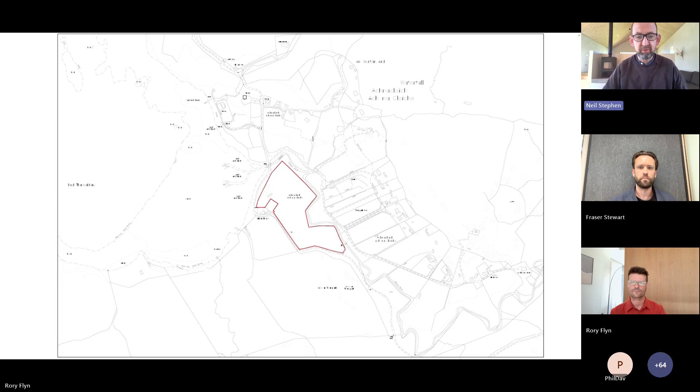I think when you're designing as an architect, you want to have constraints to work against, because when you're working against something, ideas follow. The hardest thing for an architect is just to have a completely flat field with no context.

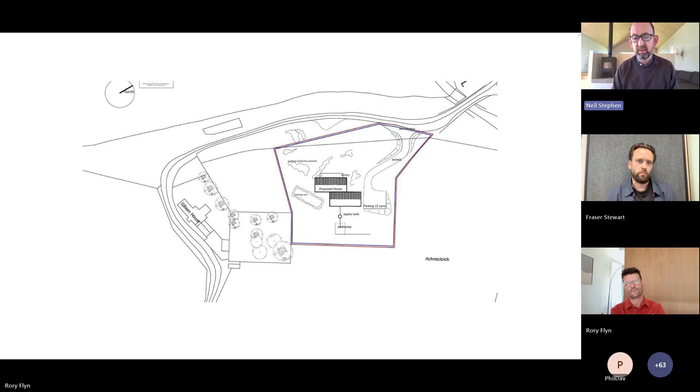And it didn't, and it just sort of felt as if it was plonked on top of a hill, and it would have great views, but we wanted to do something that was tied in more with the existing walls and felt as if it could be an outbuilding to the large White House, which is Gillen House.

So this is our diagram. If you look at that, it looks very simple, but there's a stone wall there. You'll see the dotted lines, and that's our house that's opposite it. Now that wall is 25 metres long, and so we decided to make our house 25 metres long. And that sounds slightly arbitrary, but actually worked out okay.

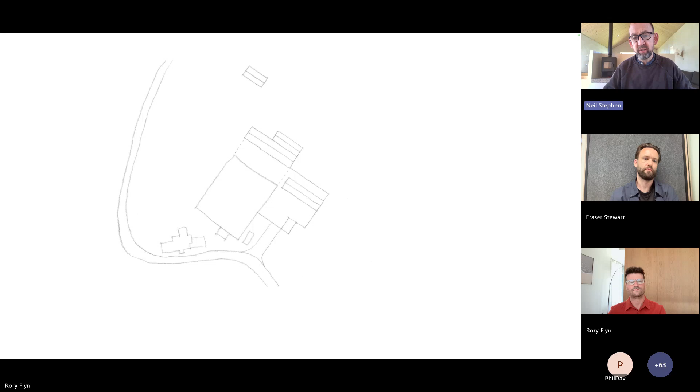And it gave us what will become—at the moment it's a football pitch for our 7-year-old, but it will become a garden, a sort of walled garden that's enclosed by those dimensions. And that was our idea about where to place the building in terms of trying to create some sort of context, but also had to have a byre and also another outbuilding which should be a holiday let.

So if we move on to the next slide, there's the house, there's the guest accommodation, there's the byre. So the house itself, it's a longhouse with 2 equal forms, and our idea in the way this was planned, which was to follow through, was...

We knew there was this lovely view looking out over the sea, and the previous planning consent was saying, let's do a wall of glass facing out to sea. We wanted to create a sense, our idea was to create a sense of reveal.

So you go through a journey through the house, so you go into a small entrance lobby with utility off to one side with a lower space. You go through into a larger hallway with storage, and as you walk through the building, you get a tantalizing glimpse up—there's a window to the view up, but you don't quite see it as you come in.

Instead, you're getting these tall windows facing out onto what will be the garden, or as it is just now, a football pitch. So it's a really simple idea, but it was trying to articulate it in plan.

One of Laura's strong ideas was, I don't want this to look like a standard Heb home or a standard Dualchas house, which would potentially have been a lot cheaper for us, I think. But she wanted it to be a building that's really bedded in the ground, that's built of clay block and had a real solidity to it.

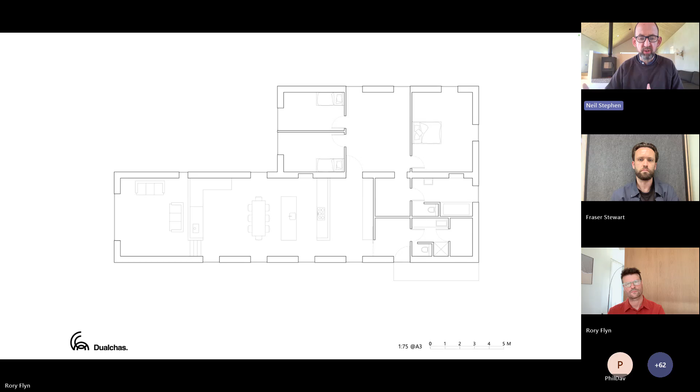And there was to be no paints, no plasterboards, to minimise membranes, just to make it a very natural building. So the clear articulation of those materials also had to be clearly articulated in the plan, so we could actually deliver that when it came to it.

So if we go to the next slide, you'll see the section. It's a very, very simple form. Now, just because something is a simple form doesn't mean to say that the building is simple, because trying to deliver those forms required a bit of thought and skill.

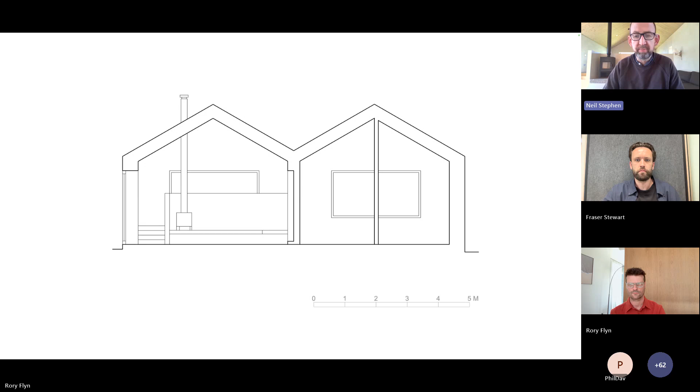Because you'll see there's no visible ridge beam in the roof. But it gives us that really, really clean space that you can maybe just see above me here. And that was one of the things that we wanted to achieve. Maybe we can show it in the next slides how it's done.

Externally, we have these very simple roof forms. We thought in the landscape, as you approach this building, having these simple pitched roofs facing each other, reflecting the jagged nature of the Cuillins behind, would actually soften it in the landscape. If it was just one big form with a horizontal line as you approached, it would jar against the hills. So you're thinking about context, not just how the building works, but how it would actually look in the landscape with these simple forms.

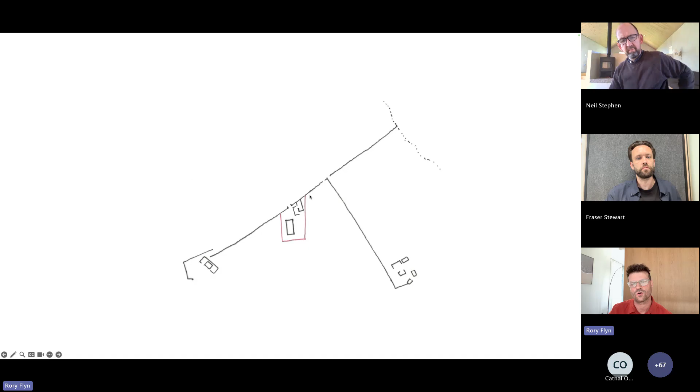This was the immediate context for the building and something that we wanted to work with. So this shows the break in the wall, which allows the roads to come into the site, and this is the existing house. At the moment there's an existing shed in the corner here, and the idea was to build a new structure right in against that wall and rebuild the section of the wall that runs through the site that the client is in control of.

So this shows the break in the wall and the new building here and the existing building. The idea really was to work with 3 new walls and 1 existing wall.

So a new stone wall hides the building from the houses around and the house on the site, and then a new timber wall forms storage and kitchen and a warm lining to the interior, and a new glazed wall sits on the existing stone wall, the restored section of the existing stone wall, and gives a clear outlook to the horizon, to Brothers Point, and also up the existing stone wall.

So there's a very strong relationship between the walls. The clients were able to purchase a piece of land on the other side of the wall, which meant we could glaze right up to the perceived boundary.

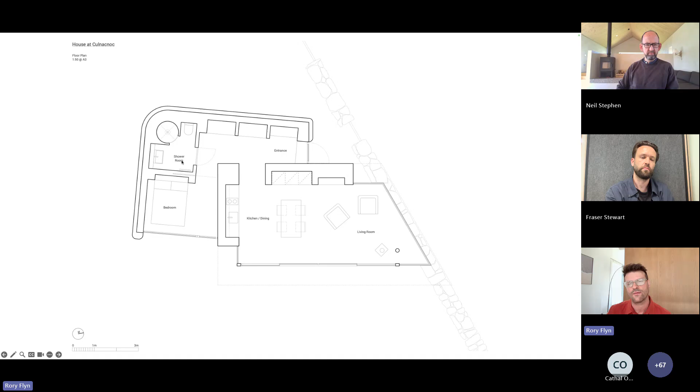And it's a very, very simple plan, which allows a very sheltered entrance, a private bedroom and shower, and then an open plan room, which opens out into the landscape. And it was that strong idea that was followed through on site.

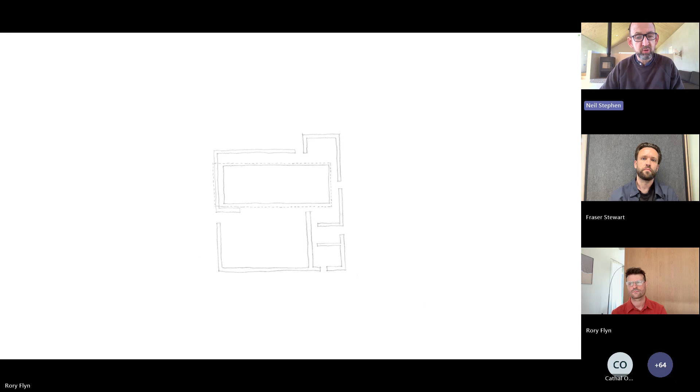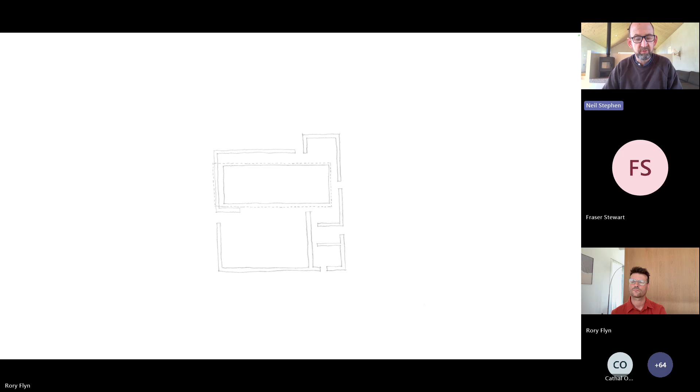Now, one of the key things in architecture when you're doing a project, and I always say this to clients, the most important part of the project is the initial design, the initial idea, because if you get it wrong and you keep going with it, whether you're doing planning or warrant drawings, but you're still not quite sure about it, then it's a lot of hard work and a lot of effort for something you're not convinced by. And I think if you can get a strong idea and follow it through, it's a much more enjoyable process for both the architect and the client, because architecture should be good fun. These sort of projects should be great fun if they go well.

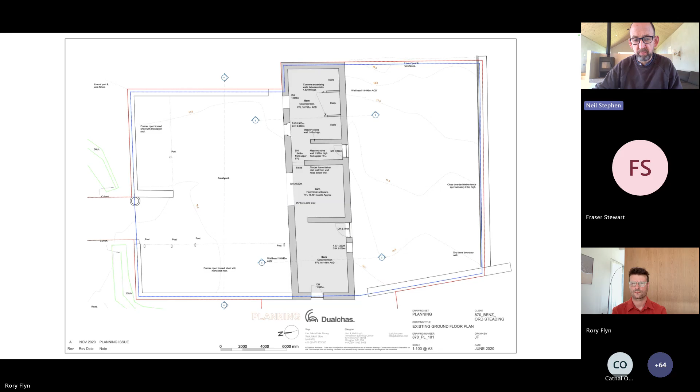So that was the existing ruin, and that elevation here, which is the approach elevation that's come down the road, we wanted just to retain that, but to place a building here, we'd have to just take away some of it. By this point, the roof had collapsed in this building. By the time we came back to it, there were just fragments of rusty sheeting lying down. So it wasn't really intact, it was more like a fragment of walls. You've got stone walls, perimeter walls around here, but we thought we'll just take away an element of stone here and locate the building at the back, as Laura had suggested in her idea.

So the next slide should show how we approached it. Just to describe, we've retained that elevation, put in a shed here, created parking here. So you come in the existing opening. There's an existing window there, which is the foot of a stairs, where you go up some steps to an elevated platform. We can get a view out over what will become a courtyard garden.

Below the platform, we actually contained some of the drainage system, because it's a very tight site. When you come round this existing wall, you approach the entrance, but you do not see this garden as you come in, approach the courtyard garden. And you come into a building, again, to a low space. There's a bench, there's a bit of glass, which looks through, again, the existing opening, where there'll be planting, to create an intimate sort of view.

And then through into the space where you get a view to the courtyard, and also an intimate view to what will be a fern garden at the back. And again, we're working with a landscape designer on this called Harris Bugg, who has a house in Skye, and she's one of the judges at Chelsea this year, or has been, and one of Britain's top garden designers. And this garden will be completed this summer, as I'll show you.

So that's a very simple idea, but then the staircase continues. On the ground floor, you've got a shower room with a wall of glass that looks onto a stone wall, again creating an incredibly intimate view of an existing, interesting stone wall of ferns and rust and concrete.

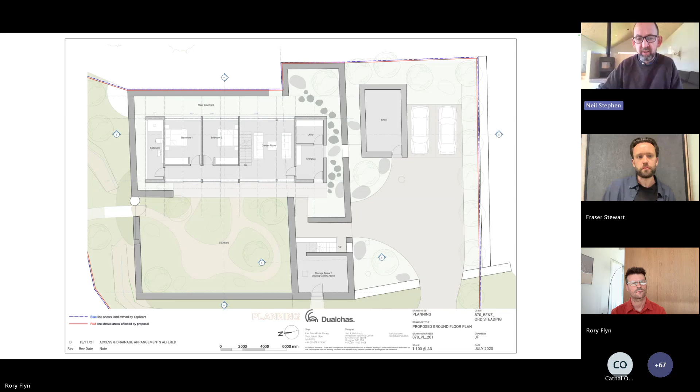And the bedrooms will look out into a fern garden to the east, which will be a dark, dank space, but will have incredible verdant growth of greenery, both in the walls and in the planting. So the base feels almost subterranean, and that would be expressed within the materials.

Then you go up some steps to something much more light filled. You come up the stairs and get a view to the rear, which is the trees. Come round, and there's your view out over the courtyard garden down below you, which will be pretty stunning.

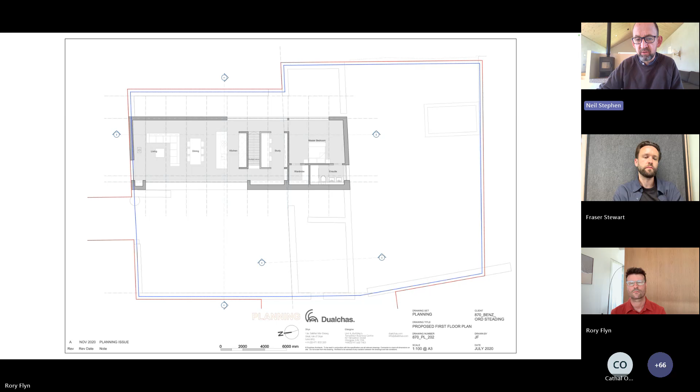And the master bedroom, again, not every room has to have the same view. So the master bedroom looks out into this fragment of stone, the stone steading. There's a bit of art going in here from the clients, but you're up amongst the birch tree canopies, and it's a really special feeling, very different to the view at the front.

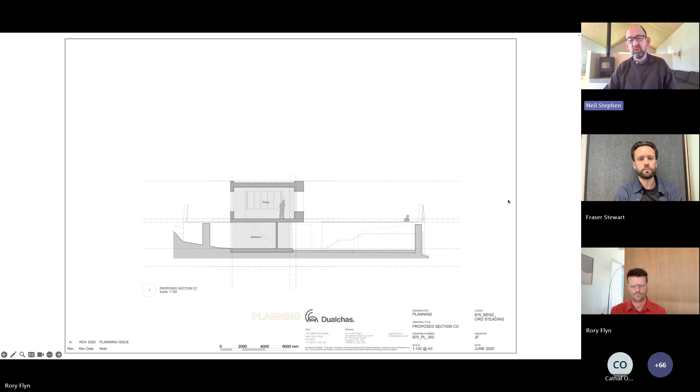And that's kind of what the section explains. In the bedroom, you've got that intimate view to an existing ruined stone wall, a view out from here to what will be a courtyard garden, and upstairs, a view to the trees at the back, and to the front, a view out over the wall, the street, and a view to the coast. So a very simple idea.

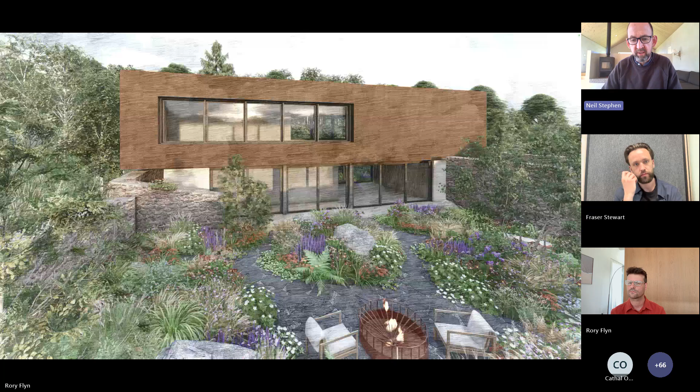So this is a visualization that the garden designer did based on our design, so you can see the idea of the garden. It's almost like we're creating a secret garden, closing this wall off. So when you come through, it'll be an astonishing surprise.

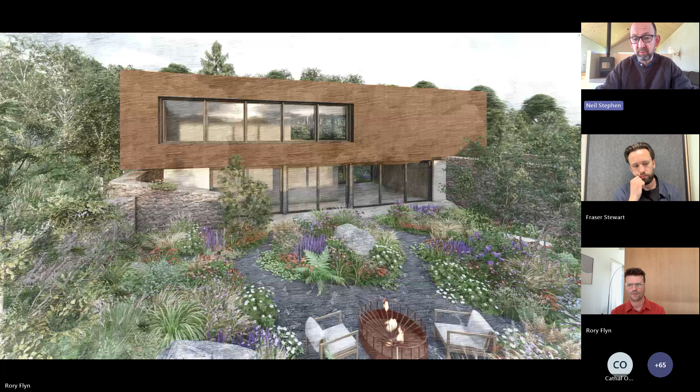Everything around that part of Ord is standard, like birch and alder trees, but we wanted the garden to feel like a burst of colour, something really special and intimate, a real surprise that people would want to come and see just for the garden. So that was the image of how we imagined it looking.

There'll be lots of planting on the outside of the building as well as within the outside of the wall, as well as within the courtyard. So it should really be transformed, and we won't get it properly photographed until that's all done and bedded in. I think there's some views of the interior.

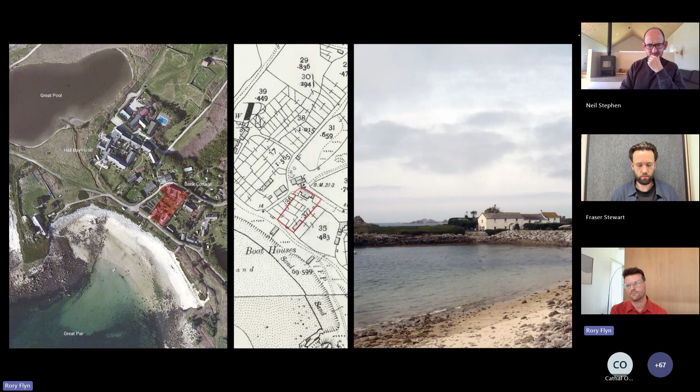And this building, seen here in a view from Great Par out to the side, is the most westerly building in England. This is a set of photos of the building that we worked with in Bryher.

So this is a neighbouring house. This is the house that we were asked to look at. It had originally been a dairy, then it had been converted into a house, and then over time it had become quite a large B&B, with 5 bedrooms for rent and another 2 bedrooms for the owners.

But the original granite building, which you see the rear elevation of onto the street, is lost within all the extensions and the renders and the new UPVC windows that have been placed all over the building. So what had originally started as a small building had been

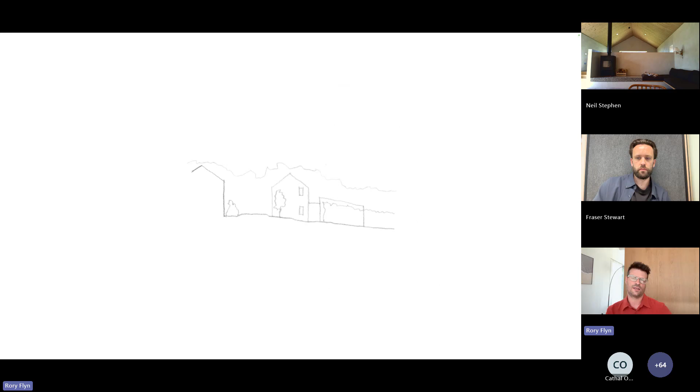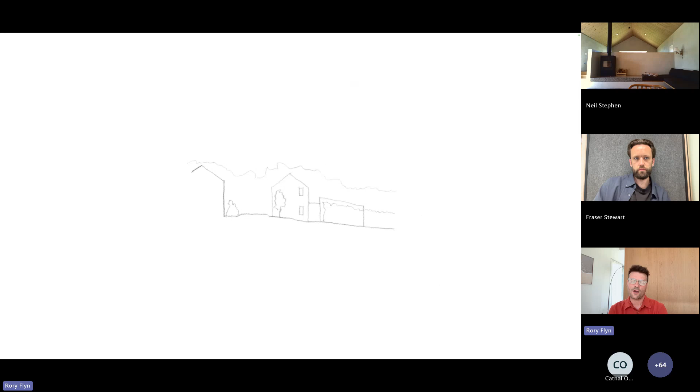So very early in the process, in fact on the first visit, we sat and made this sketch of how we wanted the building to come together, how we wanted to restore the existing granite gable with two small original openings. We wanted to make a new extension which had all the living areas that sat within the garden, related to the height of the hedge, and was a timber building related to the timber outbuildings that you see, and then to link these together with a main door in a glazed link, which gives you a transition space between the inside and the outside, and between the old and the new structures.

So this is a granite building, this is a timber building, and the timber link in this glazed link in between. And it gently steps down the hillside with the other buildings.

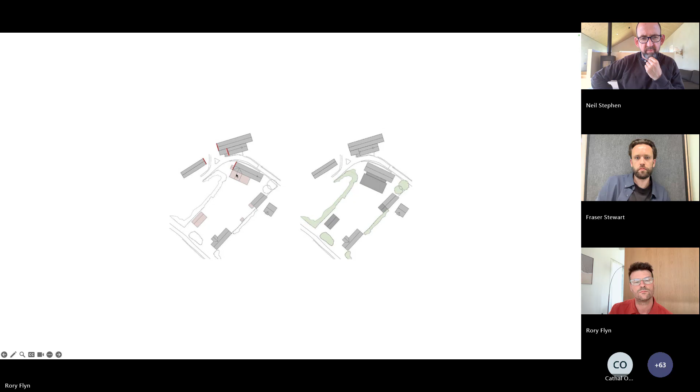So this diagram shows the confluence of paths - this is our site here. It faces onto this little junction, where they have three very strong stone gables of the existing buildings, but our gable was hidden behind the render and compromised by this large gable section that came out.

So we wanted to restore that, so there was a family of four gables facing onto this courtyard, and this was the diagram that really informed what we did. So these are the granite buildings, and then these are the timber buildings that sit within the garden ground.

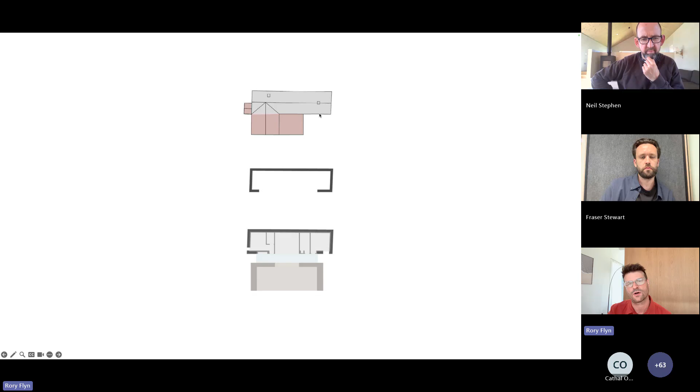And this really illustrates what we wanted to take away. The instinct was to take everything away that wasn't part of the original form, to strip that building back to its stone walls, to hollow it out, and to rebuild it with more cellular rooms.

So the idea was that we would have the bedrooms and the utility and the stair within this space, have a glazed link, and then one large open plan ground floor space which opened out into the garden.

I think really one of the things that was key was how this idea came about. This idea came about when we walked the site, and you have to actually go to site to get the idea, because it all becomes much more apparent when you're actually there. And that diagram was sketched out on site and then followed through from the beginning.

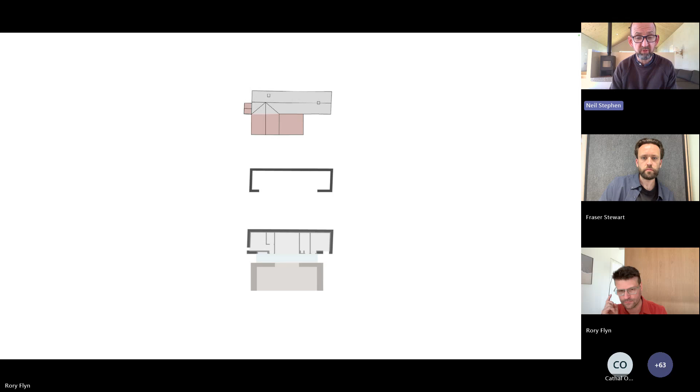Yeah, exactly. The understanding of the place - luckily on a site visit like this, we had a bit of time to soak up the place, to explore all of the corners of the island, to photograph buildings and talk about stone walls and junctions and planting and the relationship to paths and the beach. And it gave us a much richer understanding of the context, which was new to us in many ways.

It was a great site visit, really. Not every site visit you get flown out to a remote island and stay in a 5-star hotel, but we don't expect that on every job, that's for sure. It was wonderful.

But in our hands, that wasn't going to happen. We were going to really try and pick up on the character of the place and make sure that this building fitted in, and in fact improved the environment that it was in, rather than detracting from it.

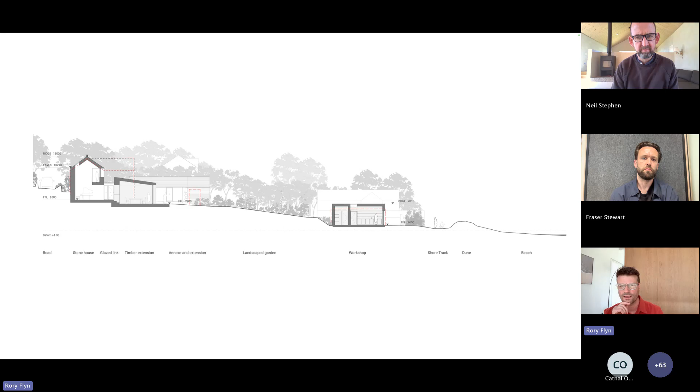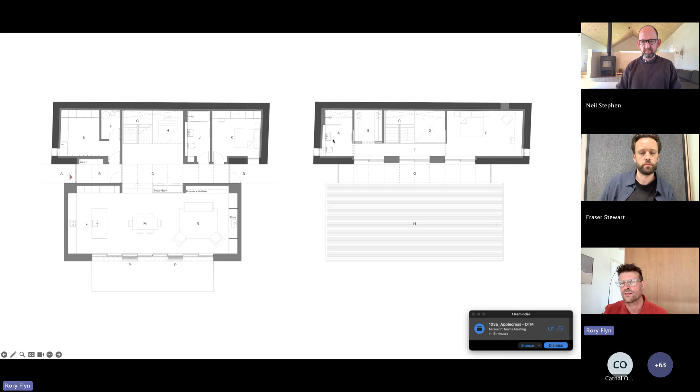Upstairs, three windows, also in the rhythm of the windows on the ground floor, look out over the top of the timber extension. This is really the master suite, spread out across a whole floor. As you can see, that is the continuation of that very simple first-day sketch, followed through.

But it was quite a story to build on an island like Bryher. It doesn't have a substantial pier where you can land materials, so everything was delivered to site by landing craft onto the beach. The contractor, who can be seen here, used a tractor to take everything over to the site, and had a rake with him all the time to rake the sand back and get rid of the tire tracks you see here.

Everything came in - all the windows, everything - and it was very carefully treated. We had to use a storage area on Penzance and bring everything in just as it was required, so as not to clutter up the site, and also to manage that single path that runs around the island very carefully.

The first phase that was completed was the studio down at the boathouse, which is now a hive of activity. The artist has a sideline as well as her own work - she also makes signs for all of the different businesses on Bryher and Tresco and all of the Scilly Isles, so she has hand-painted signs. It's a really fantastic place, and she can sell to passing tourists on the walk along the beach.

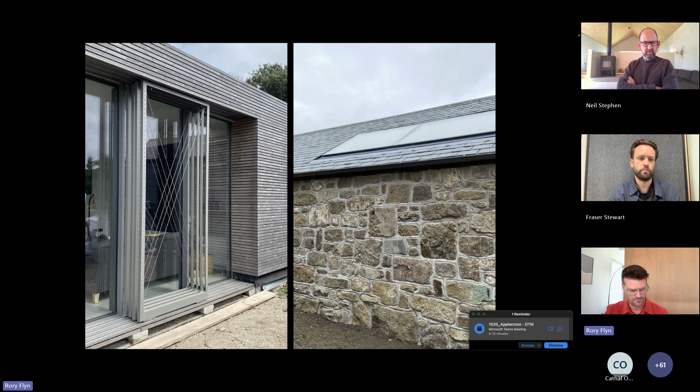Those two strong ideas—wanting to find this building and keep its historic connection to the street edge—we've achieved on this side, and that simple diagram is followed through to the junction of roads at the entrance.

This building is just about to be photographed. It was completed last year, and we've been waiting till summer to get it photographed, so the garden will be fully established and we can see how it's bedded in over time.

And we have another one related to gardens and walls. Yes, I think we should have made walls the theme of this webinar—now that I think about it, it's all been about walls, but there you are, subliminal somehow.

This is a place called Kingsbarns in Fife. If people know the East Neuk of Fife, it's just a beautiful place—like a hidden gem of Scotland, because it's not that well connected by roads compared to other parts of Scotland, though probably better than the Highlands. It's a beautiful place, and they've done very well to preserve the quality of their villages.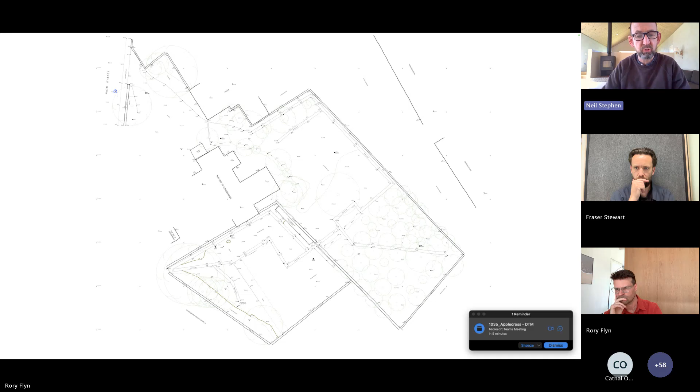So I think the next image shows this just as a contrast to the previous architect. There's nothing wrong with this approach, but it's not the approach we would have taken.

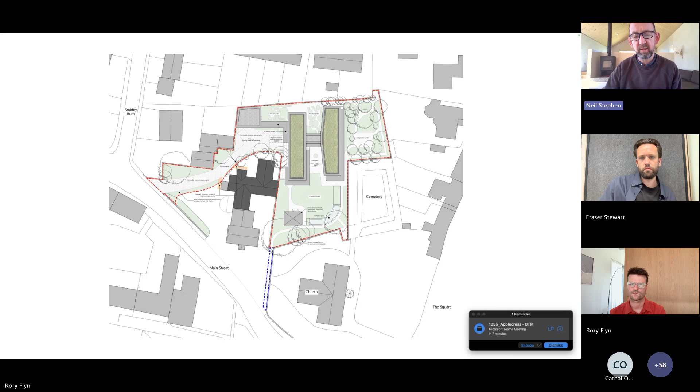So what they've done is where there was a wall, in the courtyard garden, they've taken it down. Our instinct was that wall is very important because it defined a really clear space. They've also eaten away a lot of the existing orchard, so it's become much smaller, and they've created lots of little separate gardens. I think there were 7 names for the gardens here rather than just 2 gardens plus an entranceway, which is what was there before. So they had a strong idea about creating different gardens.

Our instinct, and quite often it's instinctive how you respond to a site, was to keep as much of the orchard as possible and build on the perimeter. So you keep the integrity of the original courtyard garden at the front. You put your building up against it, but not within it. And then you create a third space, which is your entranceway, almost like another garden itself.

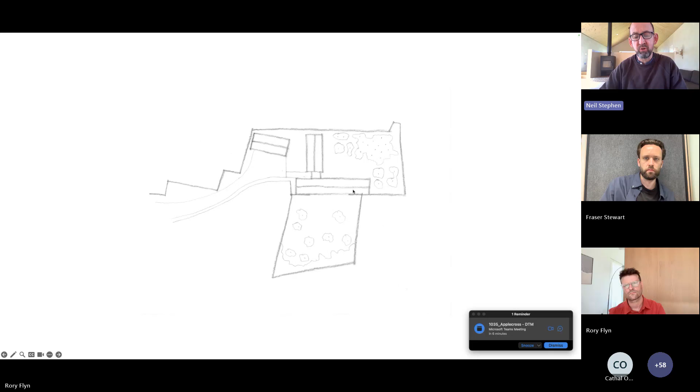So there are 3 spaces, but you're preserving the beautiful courtyard garden - you're not touching it, just restoring it. You keep the orchard as far as possible, creating intimate views with a very different feel to the orchard, and also do something new within the entrance. It was a very clear diagram, and an L-shaped building in that position was our initial sketch - that was our thought on how to approach this.

So there's a more detailed layout. You can see the layout of the buildings, the garage, creating an entrance courtyard, an entranceway, an entrance garden. You've got as many of the apple varieties preserved as possible - there'll have to be a full audit done of them, I'm sure. And then there's a new garden - you're restoring it, but doing something new with it.

Harris Bugg, the landscape architects, found this a wonderful project - I think it was Charlotte's favourite because there was so much there to work with, bringing something back to life. You've been respectful to the work done before by James Cobb, but creating something new in what is actually a very dry environment. So how you plant it, how you minimise irrigation, how you make sure it looks beautiful all year round, and how the clients can make full use of all the nooks and crannies of the garden is a really interesting project to develop.

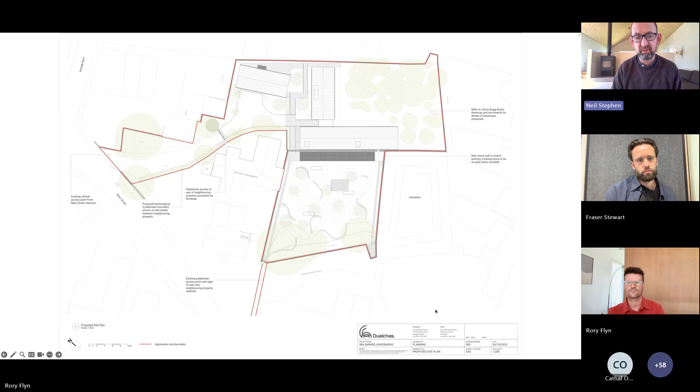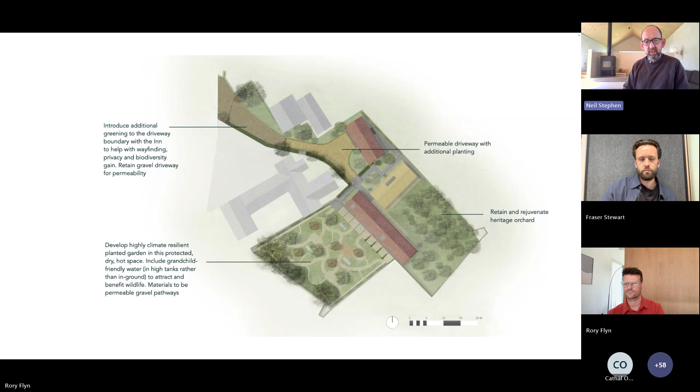So this shows the garden layout - retaining and rejuvenating the orchard, developing the climate-resilient courtyard, and creating a lovely entranceway. So it's 3 distinctive spaces, as well as just the driveway approach.

And the thought we had is, how do you create this sense of drama? So as you approach what's called courtyard garden number 2, you don't really have any idea about the orchard beyond. It's been closed off by this bedroom wing, but there's a tantalising glimpse through a glazed entranceway, so you get a glimpse of the orchard behind.

But you don't see what's called here the meadow garden - it's been blocked off by the stone wall. So the stone wall is still intact, but it becomes part of the front elevation of the main section of the building.

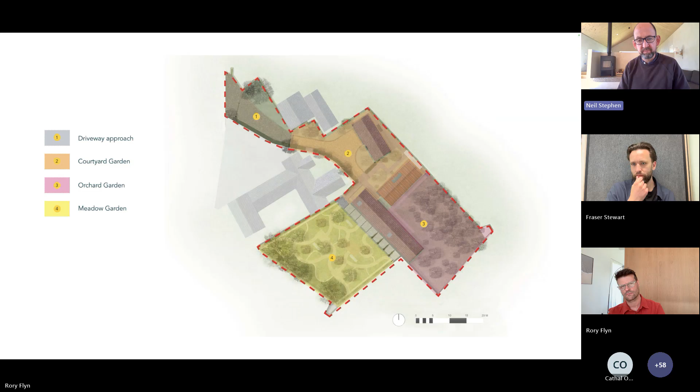So I think the next image just shows a general plan. If you can see, the entrance is kind of concealed, but you look through that glass corridor to the orchard garden, so you get a glimpse of it. As you leave your dining space to go and see who's at your front door, you can see them sort of patiently waiting for you.

The walled courtyard - the living area and the master bedroom suite has been built into the existing wall, which has been taken down and rebuilt as part of the wall. So it's trying to retain as much of the walls as possible, because it's the walls that make this place special, and you're working with them to create something respectful but beautiful, with lovely spaces.

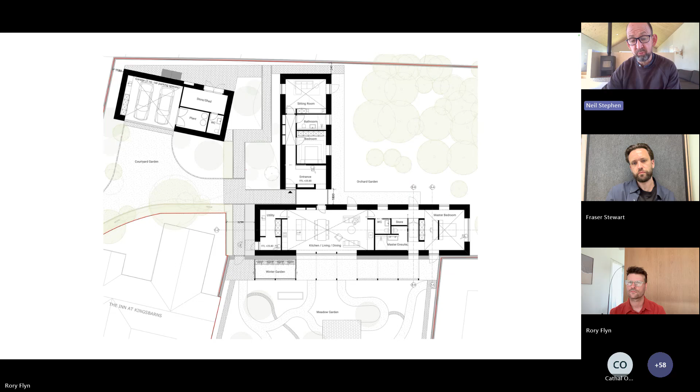When you go on site, building in a village, the context is very different to building in a field or a crofting township, where quite often you're responding to landforms, hillsides, old walls and the landscape, as we've shown. But here you've got so much else to respond to, because you've got these beautiful pantiles of the East Coast, the lovely stonework and sandstone, the castellated gables, and these chimney stacks.

I think all of this you want to respond to and be respectful to. So when you're choosing your materials, colours and forms, you don't want to do something that's going to jar. It doesn't mean you can't do contemporary architecture, but it's about doing something contemporary that also has a connection to the past. What Dualchas has always been about is trying to find that continuity of story, to pick up that thread of the past and keep going with it. A building with a story, with a connection to a place, is one future generations are more likely to cherish and look after, rather than demolish. One of the great crimes of what we've done over the last number of years in Scotland is build stuff that then has to be demolished—there's no greater example than some of the motorways built.

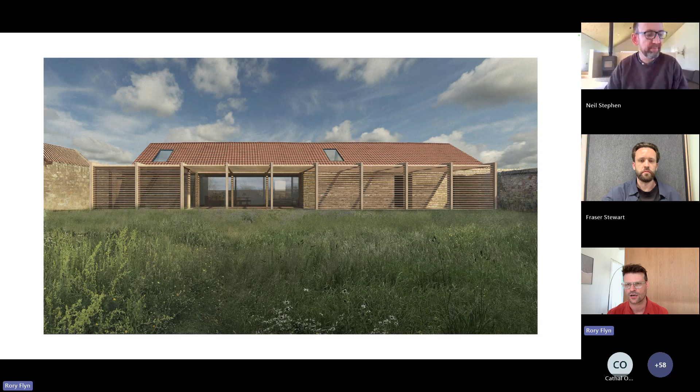This is a view into that courtyard garden, with a trellis which blurs the edge of the building. It faces directly south and opens out into the garden, and we have a winter garden here—so instead of a separate structure, we've managed to incorporate that into a louvered trellis, which blurs the edge between the building and the stone wall. That's not the actual garden proposal, just a render for the building—you'll see the garden in a minute.

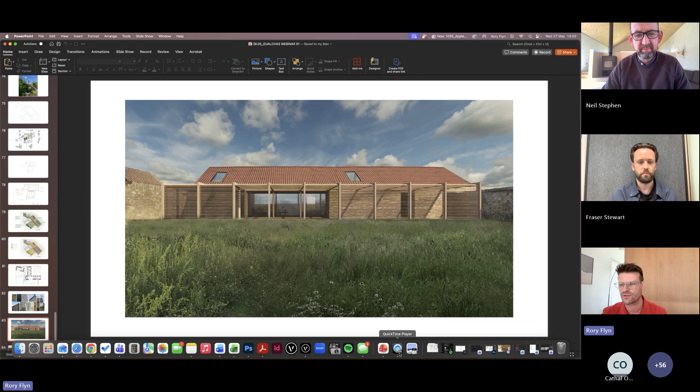To finish off on this, we have a fly-through. I think you've got another image of the Harris Bugg image—do you? No, we don't. Oh, we only have this one, but we do have it within the short fly-through film. I'll put that on now as a way to finish the talk off.

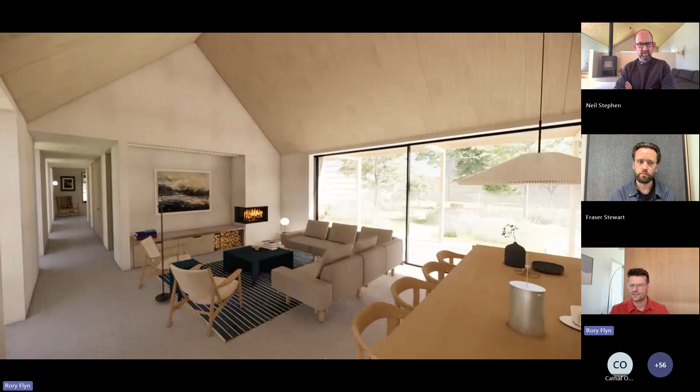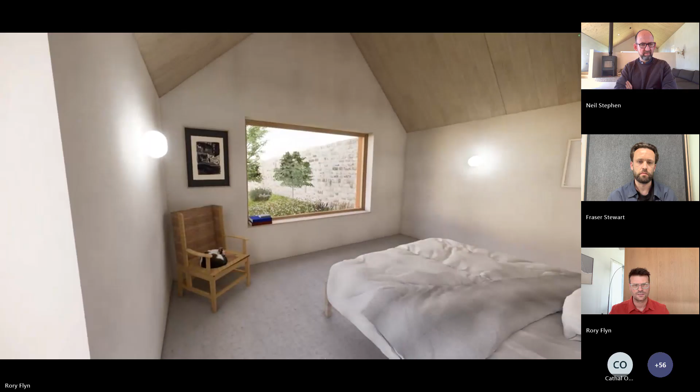This is a film created by our Glasgow office, very rich in material, which shows the flow of the building and its connection to the garden outside. You can see the new tree planting and the paths winding through the courtyard garden, and each room has a relationship to the outside in different ways and to different gardens. This moves down towards the master bedroom area and the bath, which has a private view into the garden, and also a connection directly out into the orchard. There's a cat.

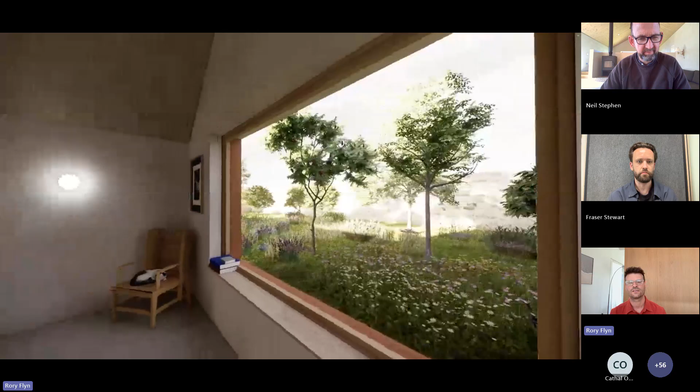This is a collaboration of Harris Bugg and Dualchas, with a very simple internal material palette so as not to distract from the exterior, which is really the star of the show—our two new buildings just fitting carefully into it to create the new spaces.

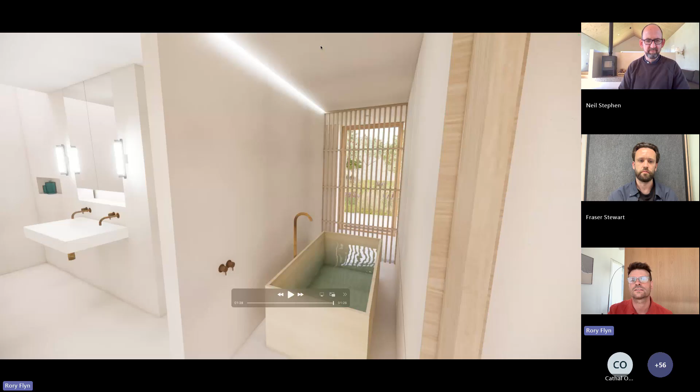Okay, great, thank you guys. We've got one question in about concept designs and where we draw inspiration from. When you're starting a project, are your concepts largely drawn from a Hebridean perspective and a close relationship with the landscape? Where do you look for inspiration as soon as you get a new client—what are you looking at? I think it is really all about context. We started in the Hebrides, and we were inspired by the Black House, which is a very contextual building.

And what we found in the Highlands was people had forgotten about the Black House. It was seen as a symbol of shame, backwardness, and people had forgotten how responsive it was, not just to the fact people were poor, but the fact that people were responding to the climate, east to west, the house that's best. So it's a very contextual building, using materials at hand.

And anywhere you go, I think context is important. So learning to respond to context, whether it's the Scilly Isles, the Hebrides, or Fife, is the most important thing, to be responsive. And I think architects that just have a style, and put that style on any concept - it's their recognisable style no matter where they build - I don't think that's responsive architecture.

I think you respond to the place and be sensitive, and that's why planners like this, because what planners are looking for is for people to do something that isn't going to make a place worse, to actually be respectful, to care for a place.